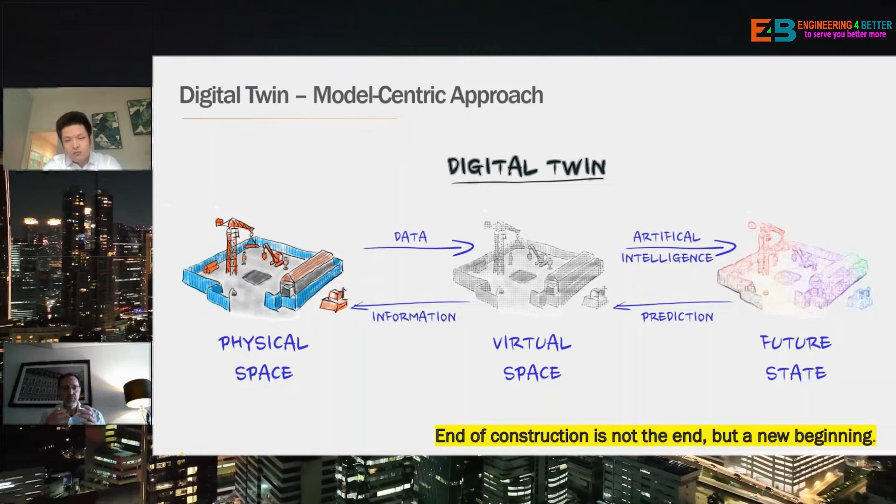From our perspective, what we do is look at this as a model-centric approach. So you have your physical space and your virtual space, and the two have an exchange of data and information between them. Then between the virtual space and the future state, you apply things like artificial intelligence. You want to do predictive and prescriptive analytics to tell you what is going to happen in the future. So the virtual space understands your real-time or near real-time monitoring of systems.

It understands the condition of your systems, and with AI infused inside of it, you can start to build a model of what is going to happen in the future. This is a very tried and true approach now.

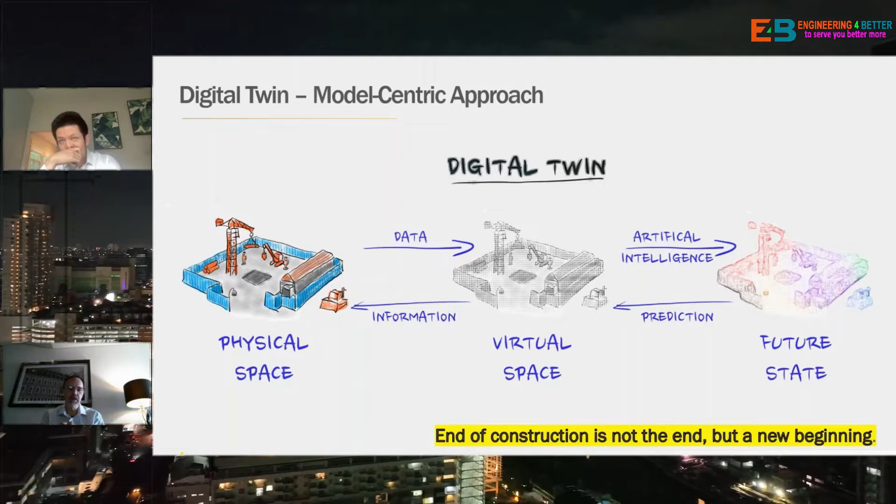I guess four years ago, when people started talking about predictive analytics, it was very cutting edge, almost bleeding edge. Now the state of the industry has advanced such that we really understand the data model you need, and we can put this in place pretty efficiently and effectively. We always like to say here, the end of construction is not the end, but a new beginning.

From our perspective, again, when we look at the different components that make up a digital twin, we have a great definition of it and an understanding of what it is. What do we have to put into this recipe to create the digital twin? So again, we have our IoT sensors, we have our CMMS platform, computerized maintenance management system, and we have our asset information model, the virtual model.

We take real estate data, meaning the facility space and lease information, and combine that with data science. You put all those pieces together, then apply a set of use cases to it. Jeff's going to go into more detail about all of these in a few minutes, but you apply the use cases, and you're able to create a digital twin that encompasses all aspects of asset and facility operations.

So people ask, am I ready for it? Where am I at? Am I at the right stage for it? There's a maturity model out there: stage 0 is your traditional stage, where you get specs and plans, PDF documents, and it gets handed over at the end of construction. But then you can advance into stage 1, the digital artifact.

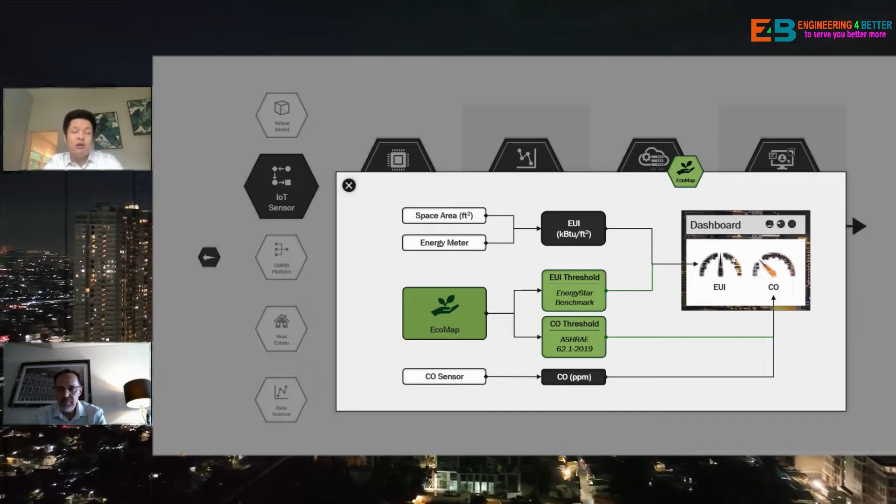All of those certifications, codings and standards have different but something in common: how you set up your sustainable goals in terms of water efficiency, energy efficiency, material reuse, indoor air quality, those kinds of things. We don't want to do any greenwashing or branding wash in favor of any certificate or do certification tracking.

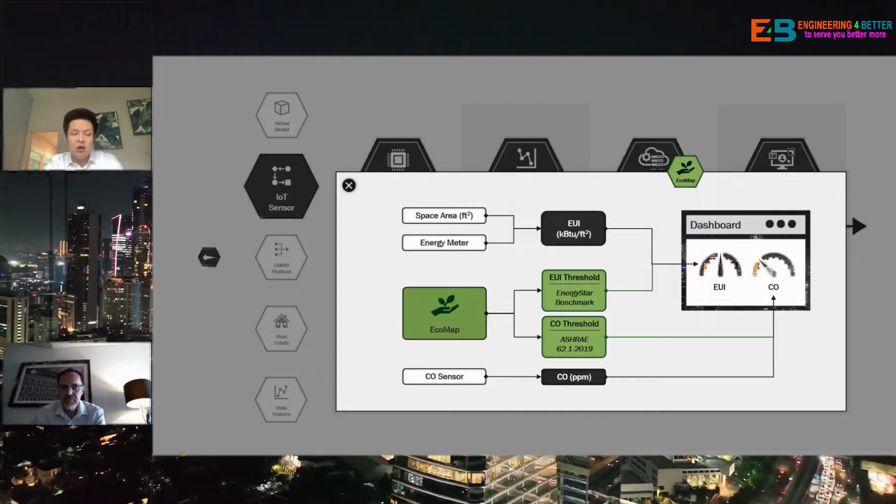We just want to grab the best part of each standard and combine it with our client experiences and past good practices to come up with a database. From that database, we can help you set up thresholds you want to get alerted on, or show KPIs on your dashboard.

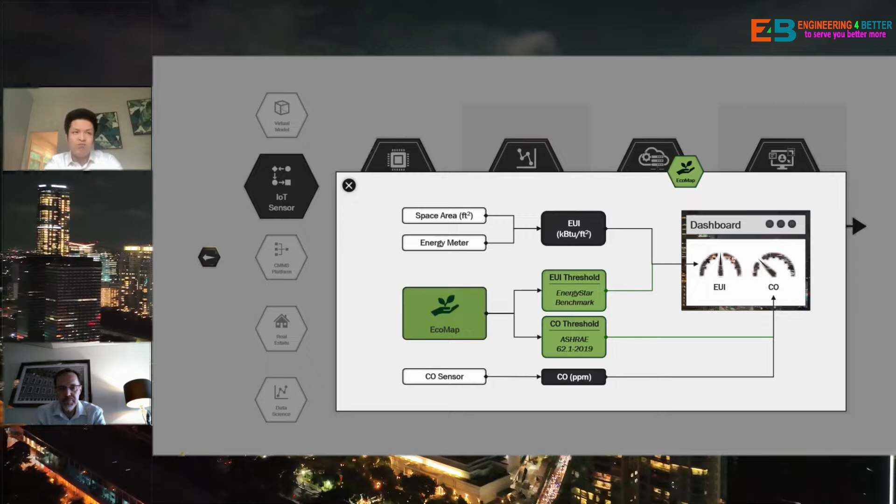Here's a quick example. We have the space area for a certain space or room, and the energy meters give you readings. Combining these two, you get kBTUs per square foot, and we compare that with our EcoMap to see if it's above, mid, or below a certain benchmark—here the Energy Star benchmark.

From the other side, we have CO sensors that give you CO density, and that compares with ASHRAE 62.1. So you can tell it's not only from one standard, it's from multiple. We're trying to give you the true meaning of why we want a sustainable, greener, more environmentally friendly environment from the building perspective.

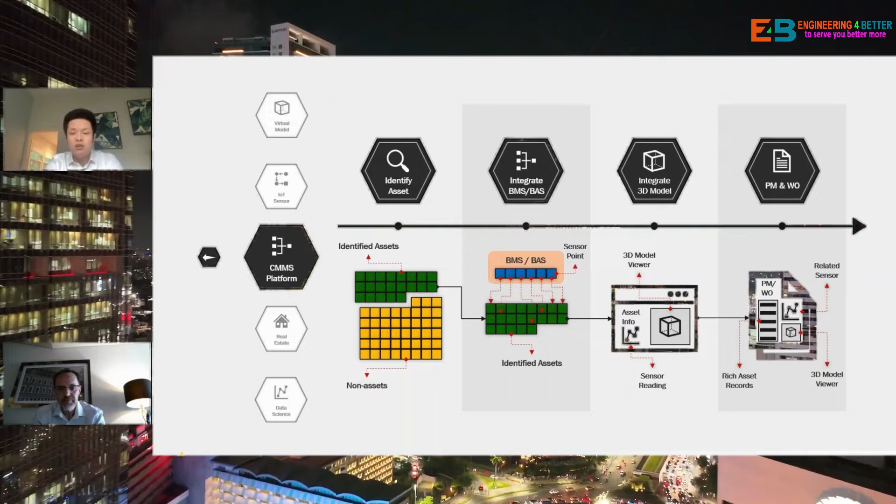Then all of this integration is going to be shown and also integrated with the 3D models, using either the GUID or the asset number, so from the front end you can actually see what the readings look like.

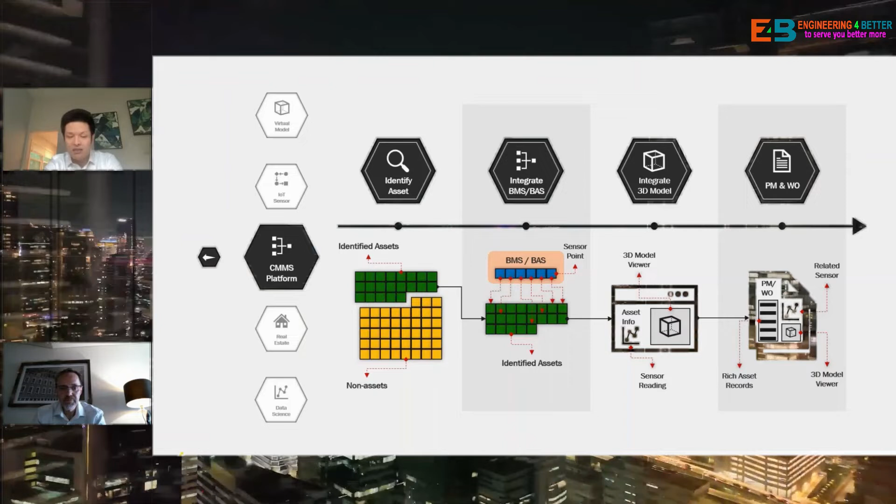Then you click on that, and it takes you to the specific corresponding asset and shows you where that thing is on a 3D floor view, showing you the surroundings. If something happens, you know what tools and manuals you can gather.

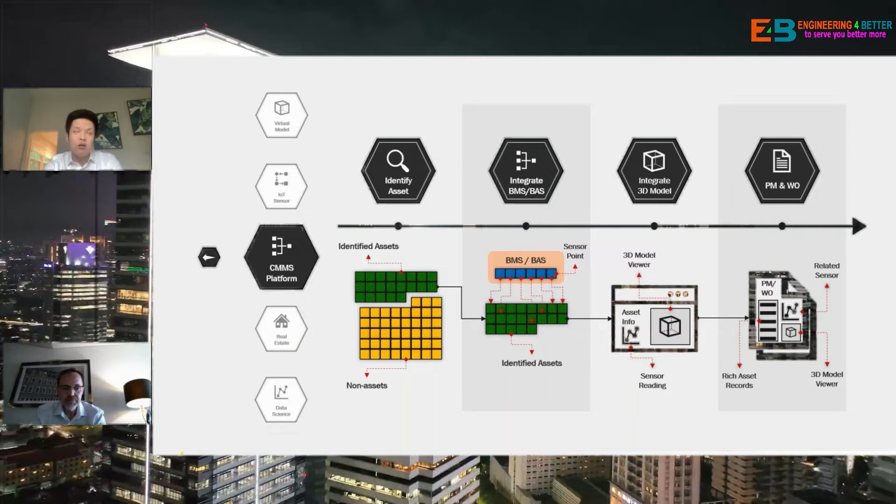This also benefits the PMs and work orders. From there, you can directly see the corresponding asset, 3D view, and the related sensor list. George, go to the next slide.

Okay, so this is an interesting place that most of our clients, or most of the company, they ignore. They don't want to consider this as part of the digital twin, but actually this is a highly demanded area.

So in order to achieve this, still 4 stages. First, you need to define a very clear goal, why you want to do the real estate digital twin implementation. You want to do space management, attract more clients, streamline your sale, lease, rent processes, you want to do marketing or visualization, data visualization, big screen dashboard or other things, because the requirements in this area are so diverse. You need to have very defined goals.

Then you need to start your data collection. If you want to do space management, you need to have all the spacing information, the square feet, the name, the arrangement, the price. The same thing applies to the leasing data, to the space usage.

Then it's about integration. What kind of dashboard you want to set up, what kind of connection between your backend database and your front end platform, how you want to link your model and your database, because now the database is not only coming from the Revit model, it's coming from your own database, even from spreadsheets. So you need to work with the client together to find the integration to make everything assembled, and eventually the dashboard or big screen is going to showcase everything in terms of data visualization, data reporting, KPIs, thresholds, notifications.

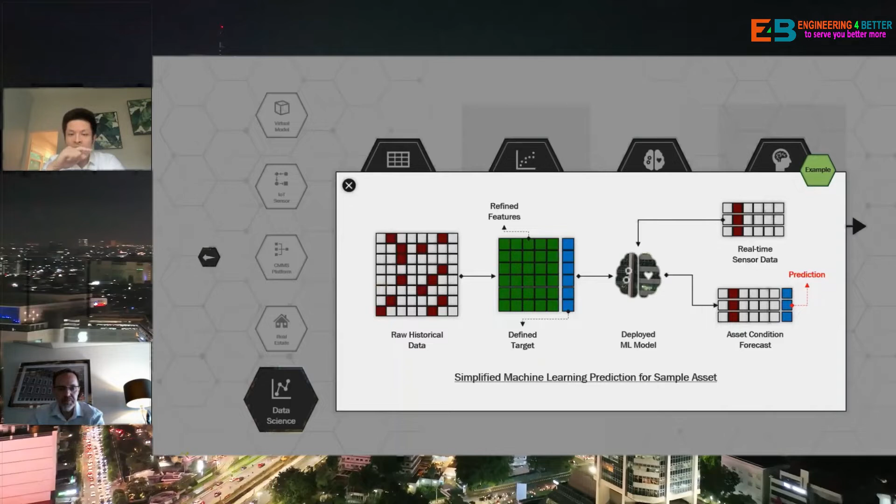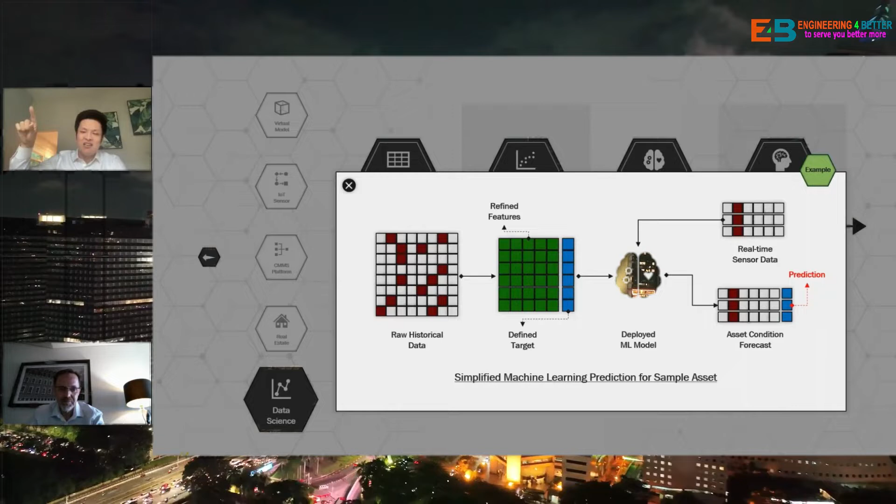Okay, so George. Oh, actually George, can you go back one slide? Yes, here. So seems like the— oh, I'm sorry, go to the next slide and go to the next slide. Okay, so the example there is not working. Josh, you can go back to the data science section. I can quickly go through that.

Okay, so this, in my opinion, is the most important section in the journey of digital twin. Usually we do data engineering and data analytics, but now due to AI trending, machine learning and deep learning have been used by all the other neighbor industries. So we are actually integrating those things into our industry, the AECO industry, and starting to benefit our workflow.

So data engineering is basically data preparation, data collection, your historical data, your on-site collected data. Data analytics here is more about the usual, how to set up the KPIs, how to do some data experiments, how to do some sensitivity analysis. Then the thing that starts to shine is the machine learning and machine learning engineering part.

There is a lot of terminology here. I don't want to just talk in detail about what is feature engineering, what is optimization. I just want to show you the example—I think that can tell the whole story. George, if you want to click that button.

Okay, so long story short, this is a very normal case. For example, you have an asset, and for that asset you have the full historical record—if it's online, if it's offline, if something is wrong. And with that history, you also have some properties or attributes of that asset.

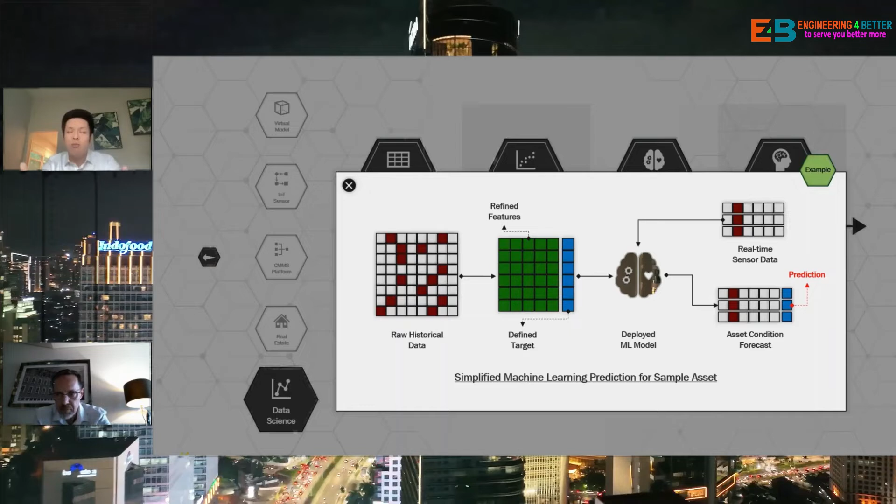So for example, if you're facing a pump, you are going to see the water quality, that's one. The usage scenario—is that a public-facing pump, or is that not a public-facing asset. What is the water quality? How many population does it serve? That kind of attributes, and eventually you're going to have a record if something is wrong with that pump.

So for example, you have thousands of this kind of historical records for that asset or for that type of asset. Then the first thing is you need to make the raw historical data clean to define the features. From the machine learning perspective, all the features will help predict the condition of that asset—in this example, for a pump, the water quality and those kinds of things.

Then you need to use all the historical data to train your digital twin, your digital brain, your digital model. And if you have new data, we call that the real-time sensor data coming in, it will say, oh okay, so you have these features.

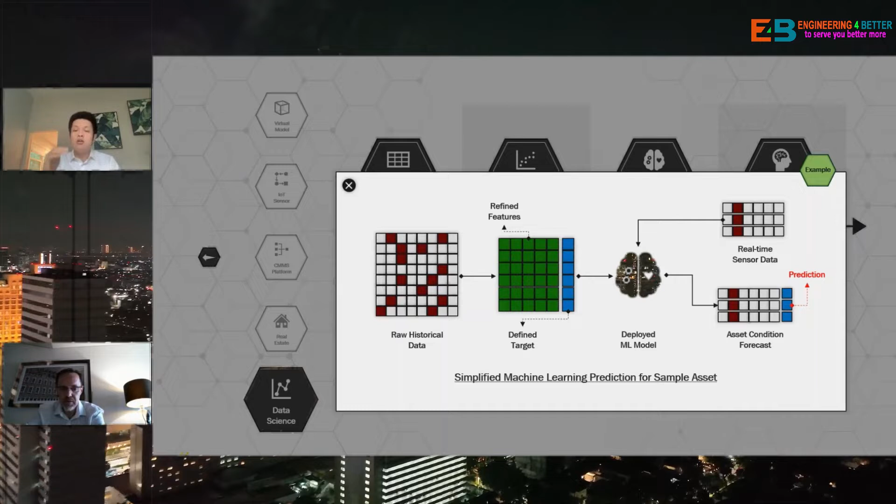Now the water quality is bad, and you put it into a public-facing usage scenario. So probably right now the pump, you need to put a PM on it in the next 2 weeks. Otherwise, something is going to happen on that asset, and the probability is probably 90%. So we are training the digital twin, the digital model, to learn all of your historical data and do some predictive maintenance or some decision-making suggestions.

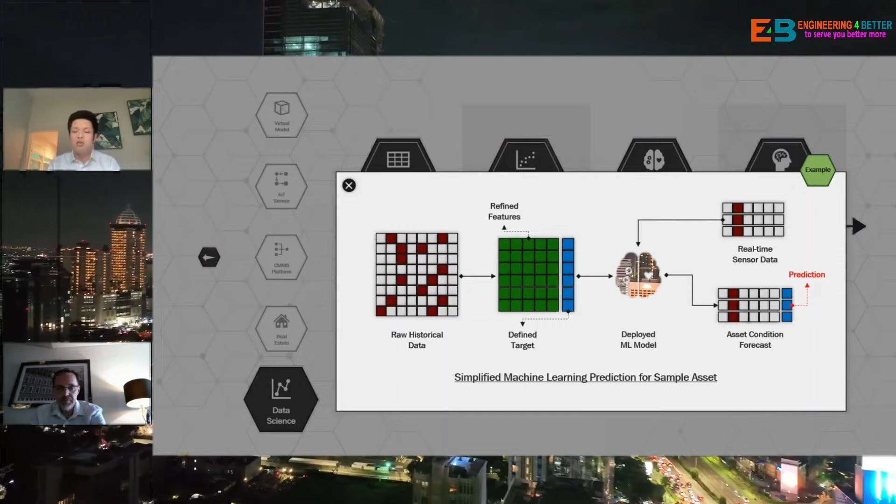George, you can go to the next slide. And in order to find a way to showcase all of the previous contents we described in the 5 sections, we actually developed what we call a 333 rule.

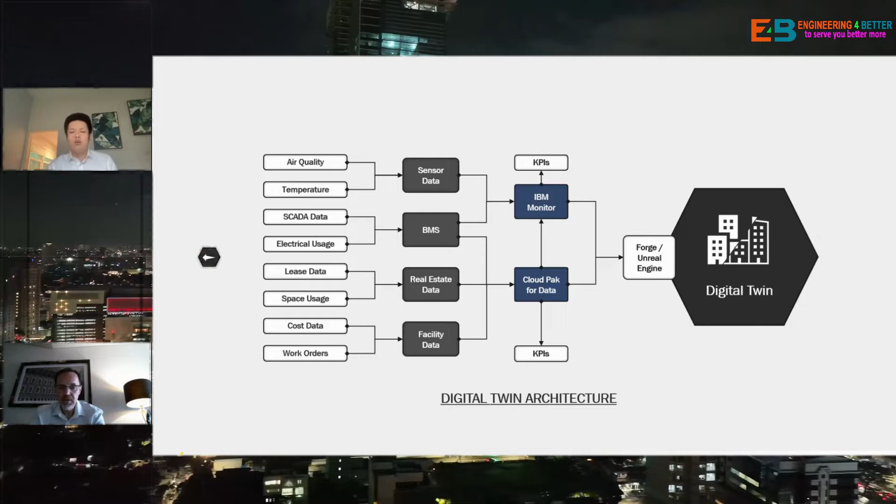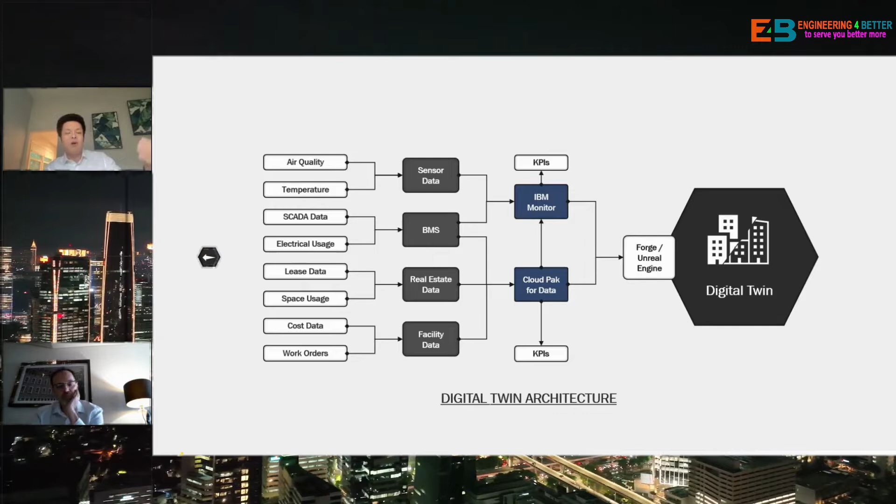George, you can go to the next slide. Yeah, then for the whole digital twin architecture, from a very high level, we have all 4 modules, and since data science covers the entire workflow from beginning to end, we don't put it here separately. All the data being collected runs through the 4 modules, goes into the Cloud Pak for Data, does some data massaging, goes into IBM Monitor to create KPIs, and eventually gets integrated with your selected front-end rendering technologies, either Forge, Unreal, or Unity engine.

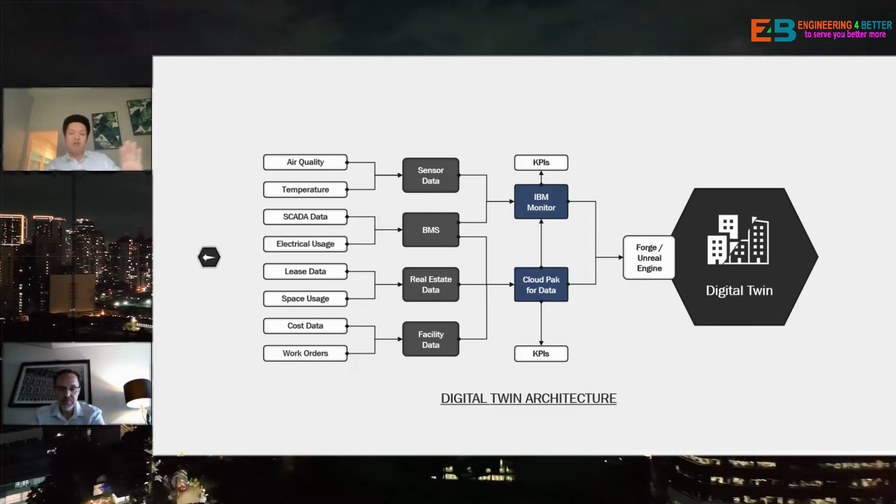Then from a user's perspective, I'm not going to worry about every technical thing on the right or the left side. I'm only going to talk about, okay, here is my platform, here is my digital twin, and all the KPIs and data reporting are here. I can start to use it. Okay George, go to the next slide.

And this is basically what we are doing right now for our clients. We have 3D models, as mentioned before, using Forge. Then we can connect it with different use cases - the BIM protocols, execution plans can fit these things into Maximo. So we have a synchronized bi-directional connections between the Revit model and your Maximo asset records. You can have the 2D drawings from the models, and we also have a cloud-based lightweight model viewer. You can check your asset status or do 3D navigations on your iPad, iPhone, or laptop. You can take it on site.

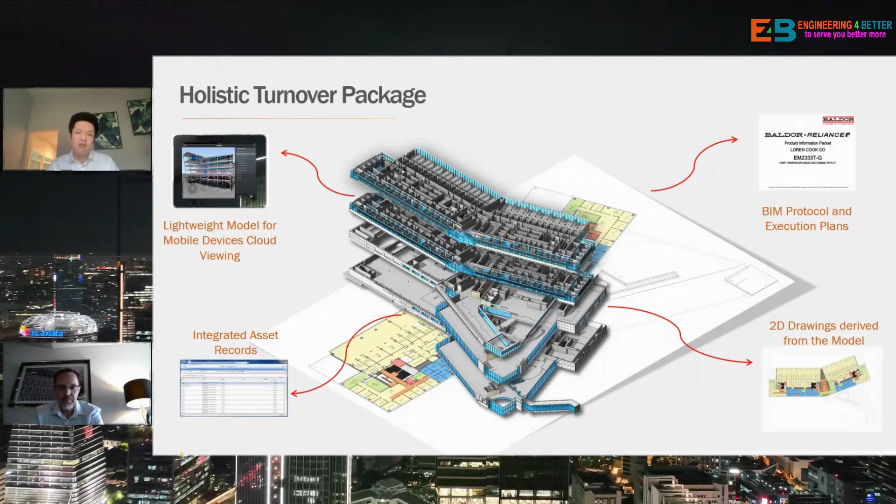So George, I think I can give the mic to you for the digital twin and facility operations. That's great, Jeff. Thank you so much.

So now let's look at digital twins and how they're used in facility operations. The idea is that we want to go from what we call the big to the small. And we really want to be able to look at the different personas that are going to be accessing the information and the technology platform that they're going to be using to access the data.

And so the technology is at a state now where we can give everybody a unified experience going from the big to the small. So on the left-hand side, we look at things like GeoBIM, GIS, Autodesk Tandem, Autodesk Forge - 2 different companies, 2 different sets of technologies now all blended together to form a unified and seamless experience. And what is this used for? Capital planning, asset investment planning, regular facility operations planning - just being able to understand what's going on within the facility itself.

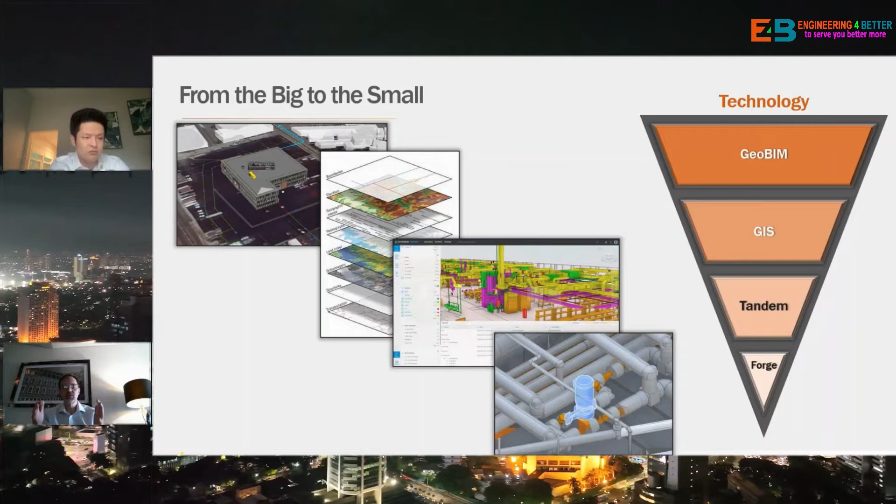When we look at the technologies, here are some examples of GeoBIM, the next big wave of technology to take over facility operations. It's about taking your 3D environment and bringing it into the GIS environment, being able to look outside the facility as well as inside, looking at where utilities come into the facility and mapping them out into the streets.

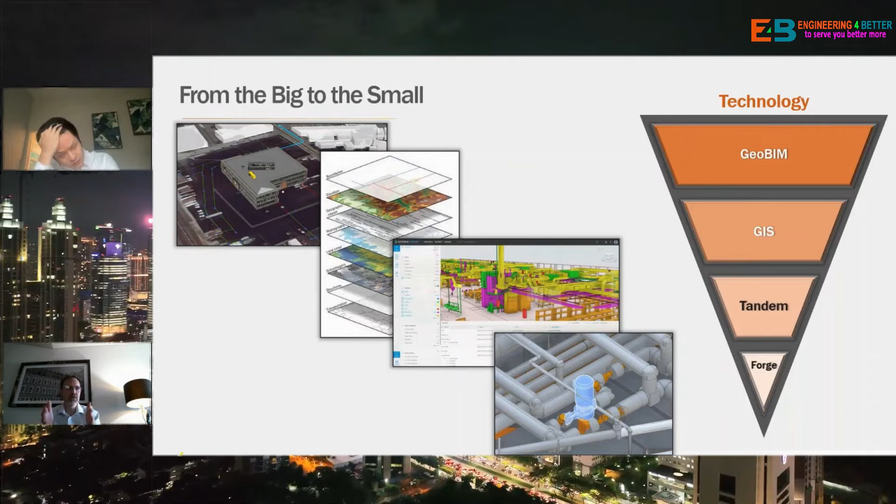Really giving facility planners a holistic view of everything they need. Standard GIS, our layers, our data, our public data sources coming together. Tandem has great potential as it's coming out of beta to provide really detailed, rich information about the facility itself. And then Forge, that viewing platform, is really going to let us zoom in on the details of individual components and elements.

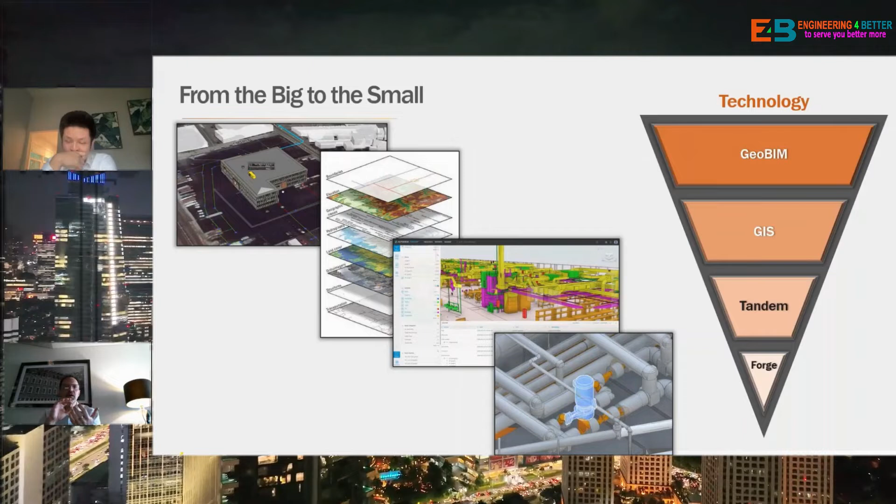Look at it. What is it connected to? How is it connected? And hand that off to the technician level itself.

So again, we look at facility operations, being able to look at anomalies and alerts using AI. How are my assets performing? What's the health of my assets across all of these systems?

Predictive failure is saying, okay, the system is telling me that in the next 30 days these components are going to fail. So let's not be reactive and have an emergency situation to go in and replace these things. We'll schedule it during normal hours so the equipment gets replaced with no downtime, no surprises, and everything moves along very efficiently and cleanly.

Now from a sustainability perspective, this is really powerful, because as equipment degrades and fails, the energy usage of that equipment goes up. So if we know something's going to fail in the next 60 days, it's going to start using more and more power over that time. So let's replace it now and gain all the energy efficiencies.

And then from the technician's perspective, just being able to do visual inspections, marking things up, taking photos, interacting with the equipment is really, really powerful. So the technician is really where all of this data and information starts to come together.

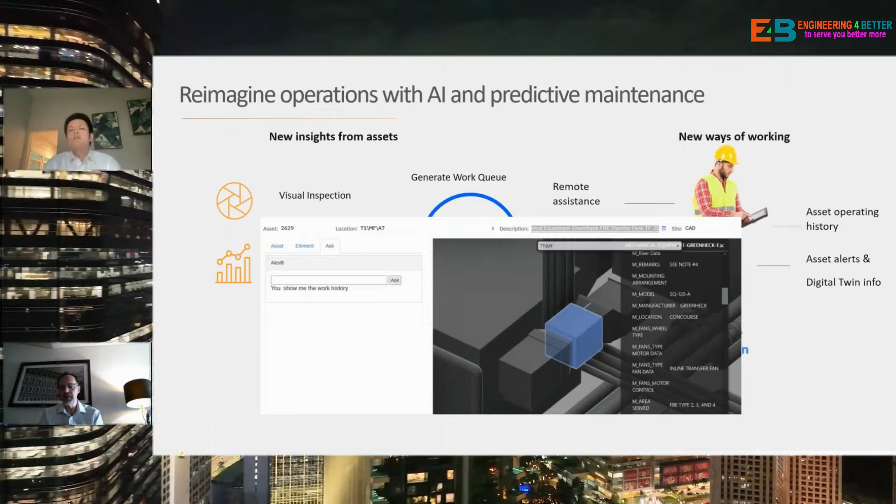And some examples we always like to show—real world, what's happening out there.

Going back to the stages, Columbia University's Manhattanville campus, a brand new campus on the Upper West Side of New York City, is really at stage 2. They have a massive effort in front of them for building this new campus, but they're doing it systematically and methodically. They are capturing digital records so they can bring the entire campus up to the next level in stage 3.

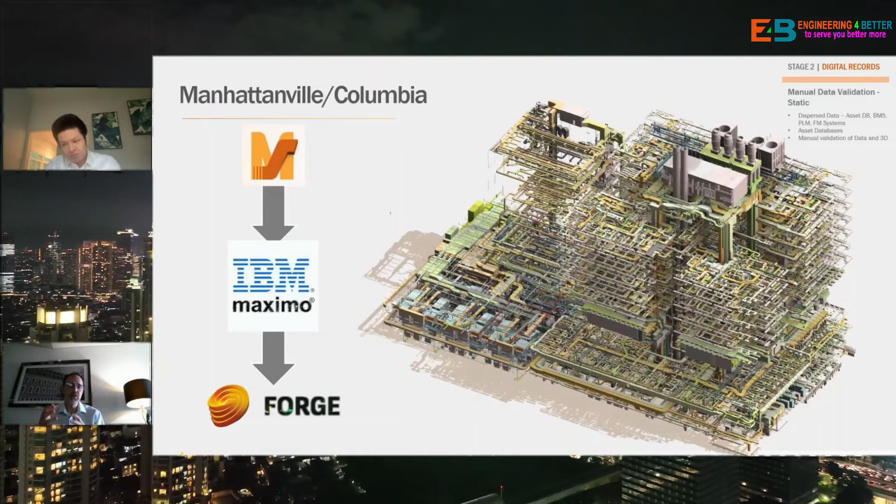So really what we're talking about from our perspective in enabling this is things like ModelStream, our flagship product for moving data between Revit and Maximo, integration with Maximo, and using Forge to bring the visualization component for the technicians into this model.

And then Penn Medicine down in Philadelphia, what we're looking at here is how does the building management system data come into a platform? How do we use our platform called ARID, our ModelStream platform? How do we bring that into Maximo? How do we bring it into Forge to enable the technicians?

And they're really at level 3 because they're doing the SCADA integration with their systems. So SCADA data coming out of your building management systems, your building automation systems, getting fed into an IBM Maximo platform. ARID is the data dictionary, just to sum it up very quickly. So it controls all the data that's flowing into the system here. Maximo is the ultimate repository for all the data. And then ModelStream is used to connect the 3D, the digital twin model information up with Forge. So really a nice package for all this coming together with them.

And really, what does this start to give us? What can we build out from this? Now, I talked about GeoBIM before in GIS. We don't want to exclude that in any way because that is a rich data set that we need to use in facility operations. So we're talking about being able to manage resources, building modeling, transportation planning, engineering, public works, public safety, utilities, telecom, crisis management, risk management, cartography, bringing all these things together into one unified model.

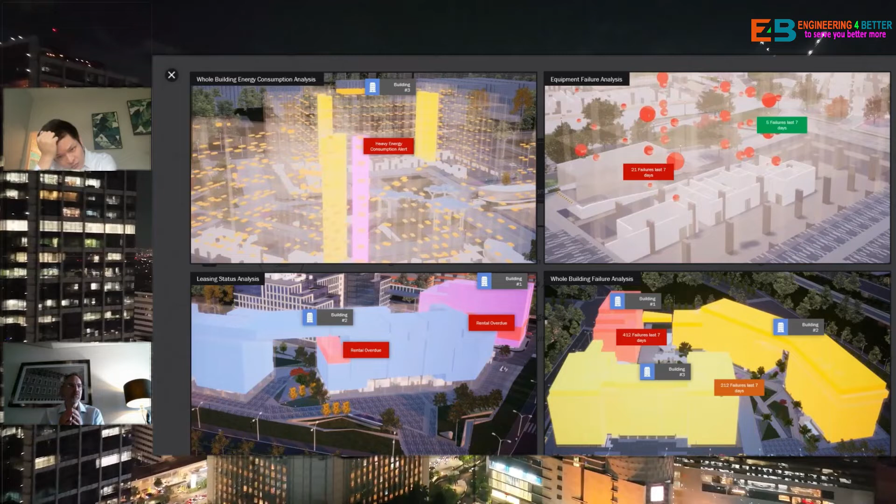And then, what does this start to look like? Again, real world situations here. We have our digital twin, we have our data, we have our real estate information, we have our building automation system, building management system coming into these systems here. We have our predictive models. So in the upper left-hand corner, we talk about whole building energy consumption data. What does it look like? Where are the hotspots in my building that's using more energy?

We look at equipment failure analysis. So this is down to the individual equipment component level. What is going to fail within the next X number of days? Leasing status, again, tying that real estate data into these systems as well. What spaces are available? How much am I using? How much free space do I have? And then whole building failure analysis.

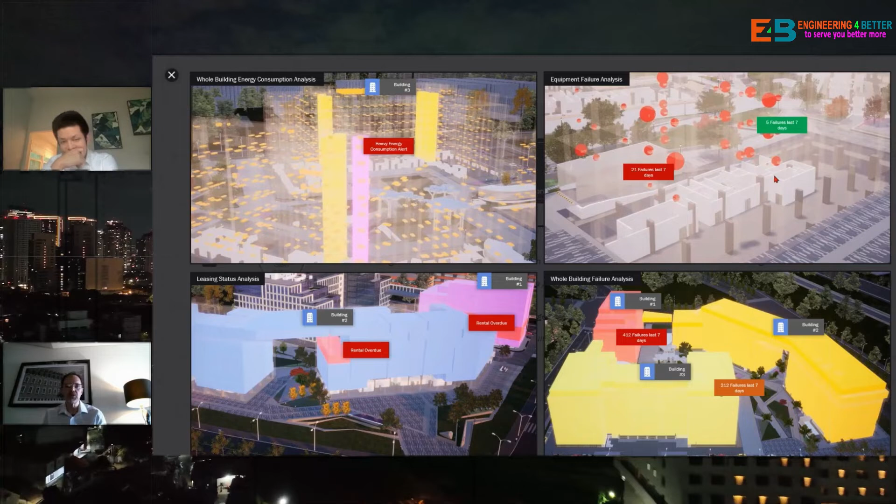Okay, so I have a large campus. What buildings should I send my teams to or concentrate on? It's great to know that I've got 3 pieces of equipment that are failing, but are they all in one building? Are they not? Again, going to that 3-3-3, the three 3s rather, and looking at what do I need to see very quickly. So in the lower right-hand corner, this is an example of that 30-second snapshot. Okay, I've got a problem with this building. I need to make sure that crews are going over there and troubleshooting and taking care of the equipment that's over there before it fails.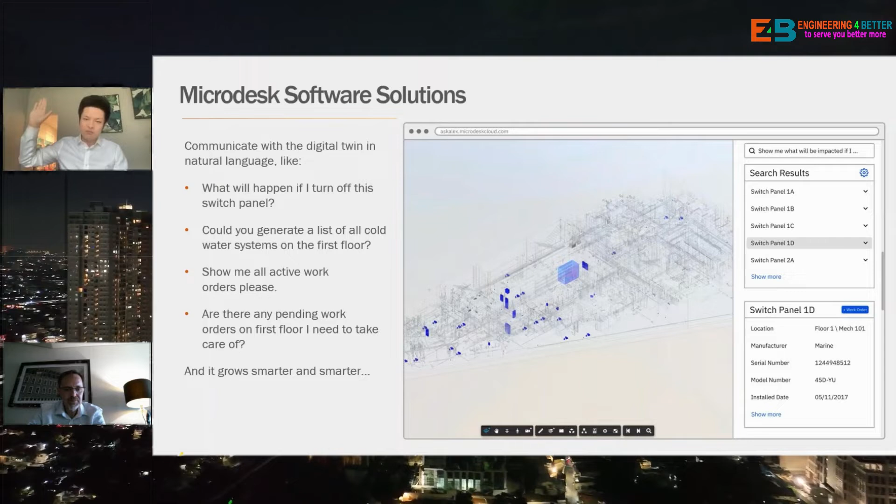Yeah, so Ask Alex is powered by Watson AI. So as I mentioned, Watson Assistant, Watson's Knowledge Studio, deployed on the IBM Cloud, and NLU. So for a facility manager, operator, director, or any people, can find these things useful from their own perspective.

More questions here. Show me all assets with a warranty expiration date within 2 weeks. What is the high priority asset on the first floor but has a very low condition? Show me all work orders waiting approval. George, come on, click.

So before we jump into the quick demo, that's a real demo, I want to show you guys a high-level architecture about it. As I mentioned, IBM Watson is going to be the backbone of it, and it will also link into and integrate with your Autodesk BIM 360. So directly connect with your BIM models over there, and your BIM model on one side is going to be hosted by your BIM 360, but also going to your CMMS through the GUI mapping.

So here, actually, we have the ModelStream to do this kind of job between your Revit model and your IBM Maximo. And other things, the spreadsheets, the IoT sensors, BAS, BMS, all go into a middleware. So that's something like a data mart to standardize all the data together and feed the IBM Watson. And also we have a separate security layer to handle everybody's security confidentials, and on the front end, on the front user interface, you're going to have the Ask Alex chatbot, and you have the 3D model viewer powered by Forge.

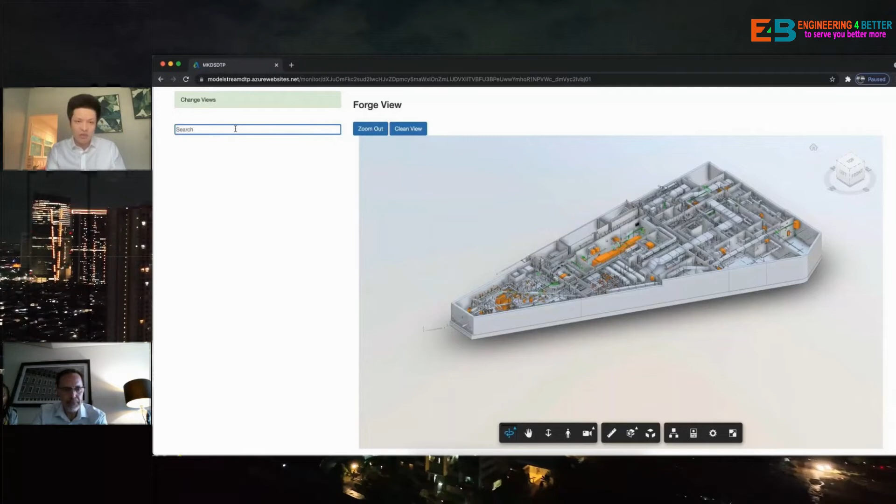So George, you can click play, and I'm going to do some narrative alongside with it. Okay, so here the first question we ask, just a random question, it's a very easy question. Show me all assets made by Eaton.

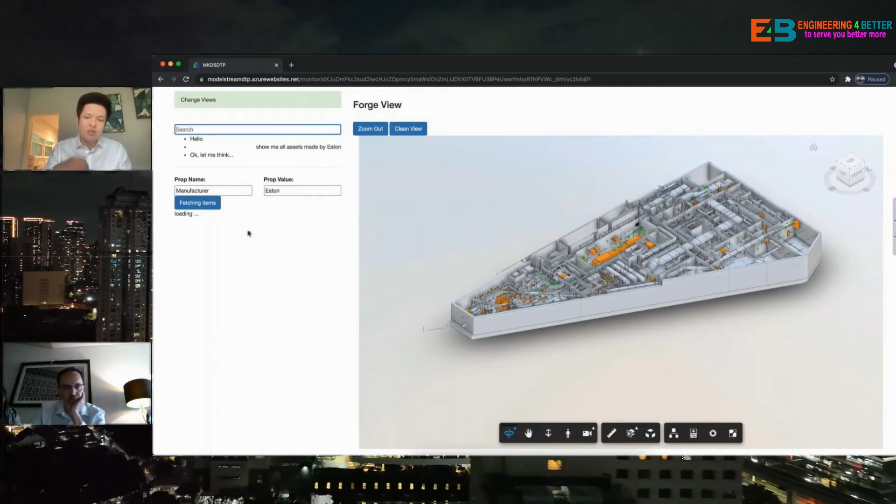Okay, so now the AI with very minimal training now understands, oh, Eaton probably wants me to find something regarding the manufacturer. Then it started thinking, it started to search for the entire building, and it actually lists everything manufactured by Eaton and showcases you in the model viewer, and also you have a list. So now if you click on any of this asset, you can just go to their corresponding entities, and you can show their properties using some Forge basic functions.

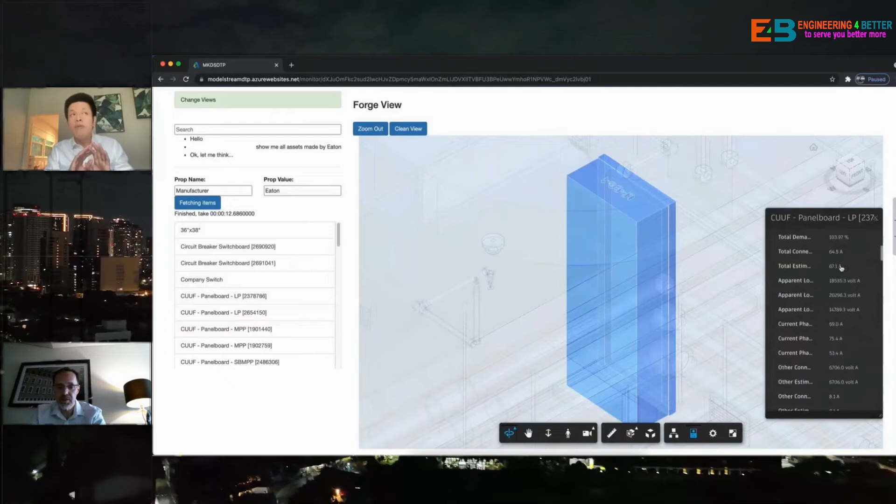So this is one of the most simple questions, and we're going to ask I think 2 or 3 more questions according to the difficulty. Okay, see, that is Eaton manufacturer. So, and also we do a fuzzy search. If your naming convention changed a little bit, that's fine.

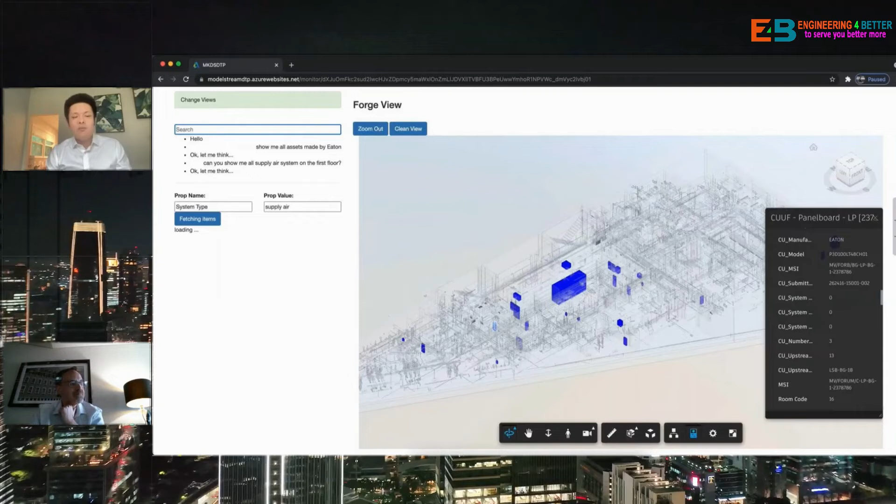Then the second question I think we asked during that time is, can you show me all supply air systems on the first floor? Okay, then here AI layer 1 said, okay, let me think. I think probably you want me to show you something about the system type, and give it to AI layer 2. AI layer 2 said, okay, I saw supply air. Supply air is definitely a system type, so let me examine your model and gather all the supply air systems and highlight them on the model viewer. And now you're going to see it here. So the speed is a little bit slow here, but in the production version, it's going to be very fast.

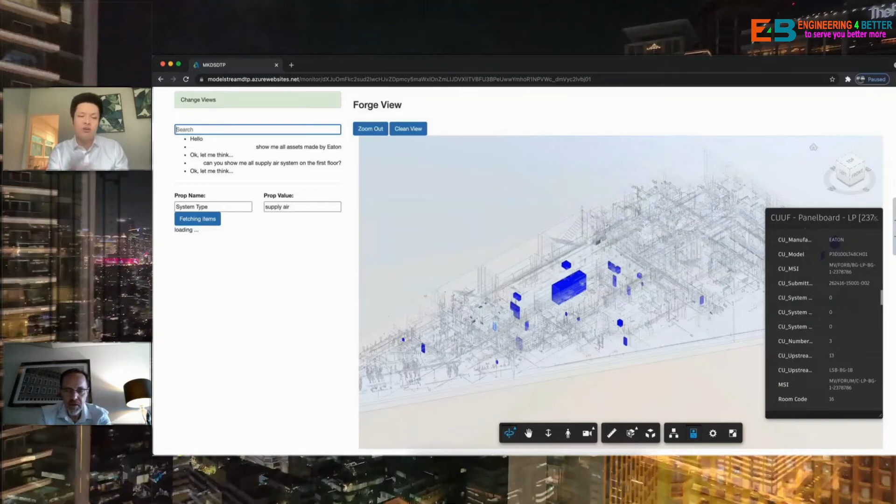And also, I just want to mention there's no UI UX here. This is basically a proof of concept with the debugging mode for our developers. So just please bear with the lousy UI for now.

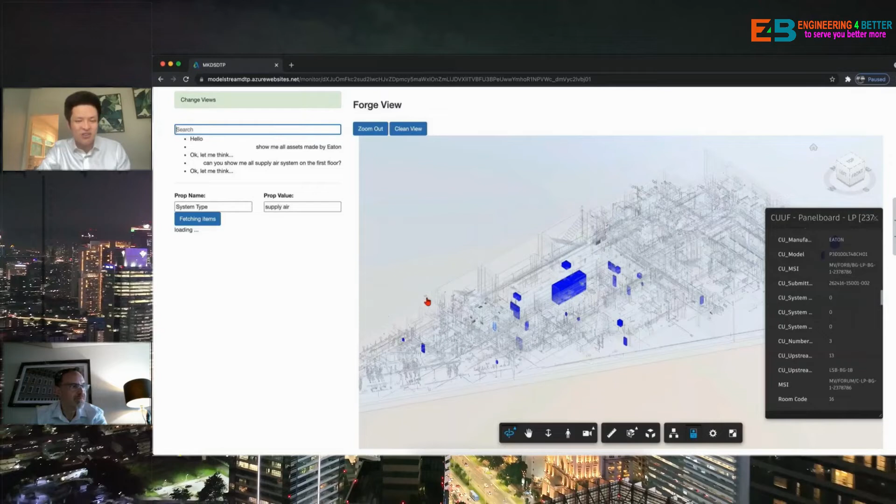Where is it? George, did you stop the video? Oh yeah, you stopped the video, George. Yeah, okay.

So then the whole supply air system got highlighted. It's kind of very hard to do just with Forge. I think it's impossible to do with organic Forge, all right? So the last question, I think we asked a very complicated one.

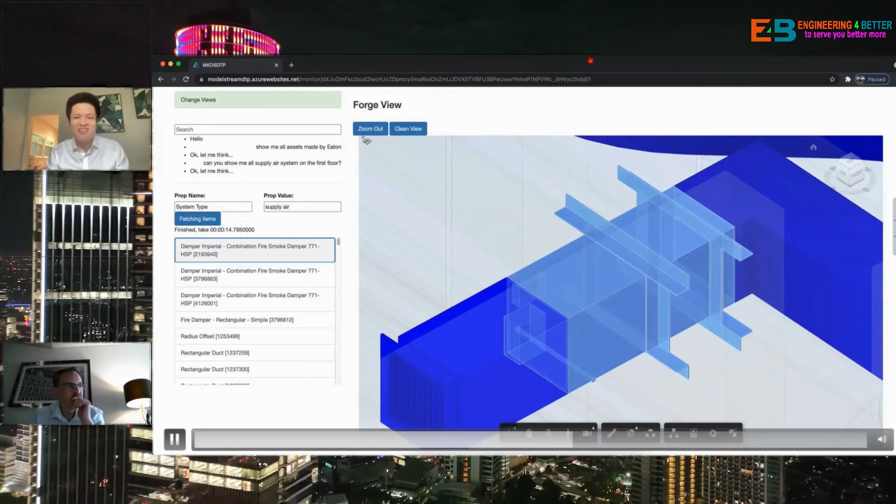George, yeah, you can just let the video play. I can catch up with the speed, so don't worry about it. It is not playing right now. I think it's paused.

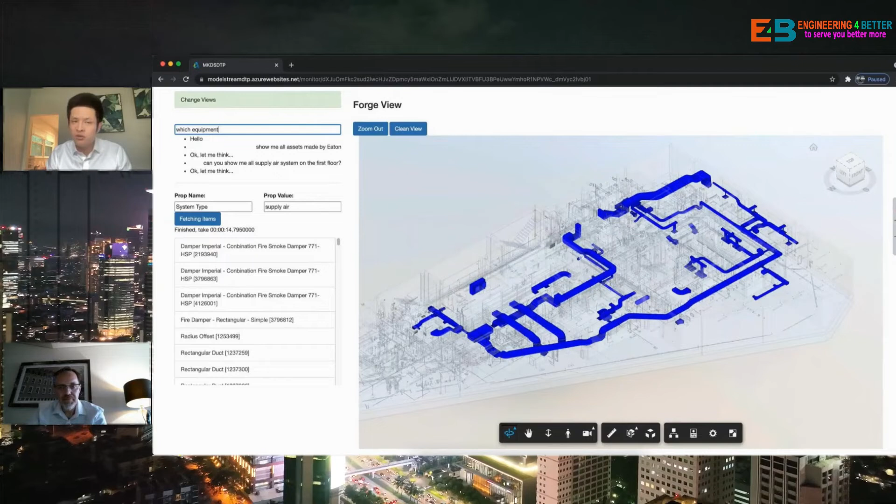Yeah, okay, just let it play. The question is very complicated. We asked, so which circuit panels are going to impact it if I turn off the selected asset? They selected the switch panel, I think. Oh, George, it paused again.

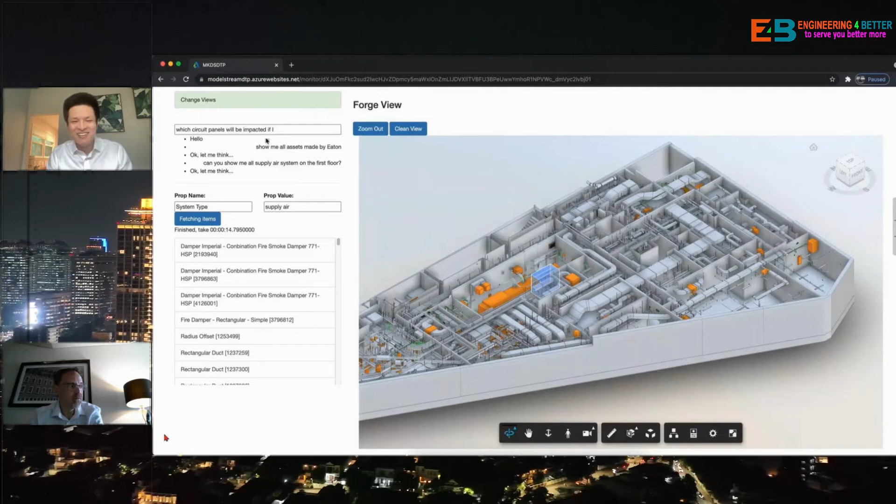So I said, which circuit panel will be impacted if... and here I go to the view and I selected the mother switchboard of everything. George, it actually paused again. If I turn this off...

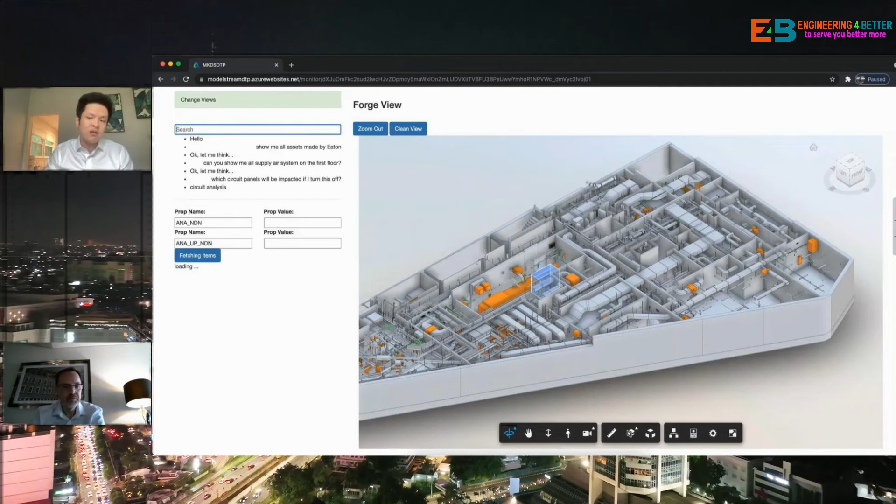So, okay, see here, the first AI layer said, oh, okay, the master wants to do a circuit analysis. And it called the layer, said, okay, so please do your job. And the layer said, okay, so here's the things I can do for you. You can tell that the mother switchgear we selected is now in pink, and all the downstream circuit panels or the sockets are highlighted in blue. So if you turn that off, everything will be shut down.

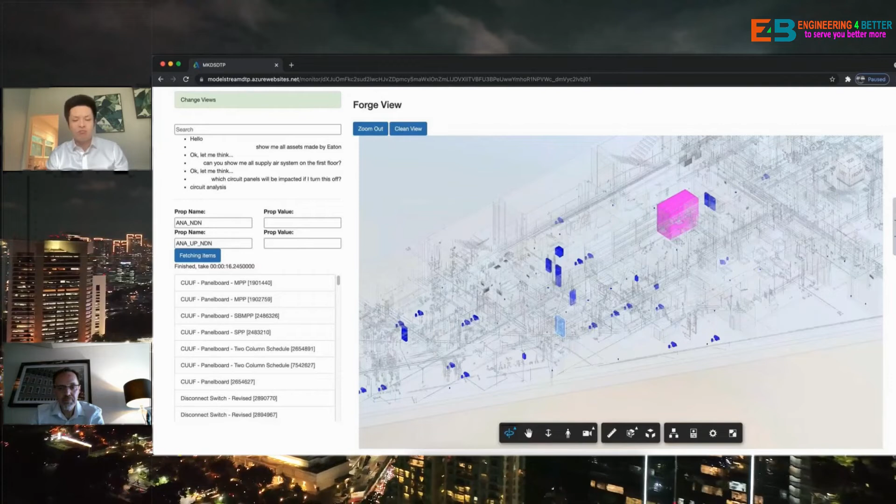And yeah, so this is basically some very fundamental functions we wanted to show you, how AI can help you. Really, all you need is to talk or to type, and the possibility is unlimited. All right, so now I'm going back, giving the mic back to George. That's again, that's a loop.